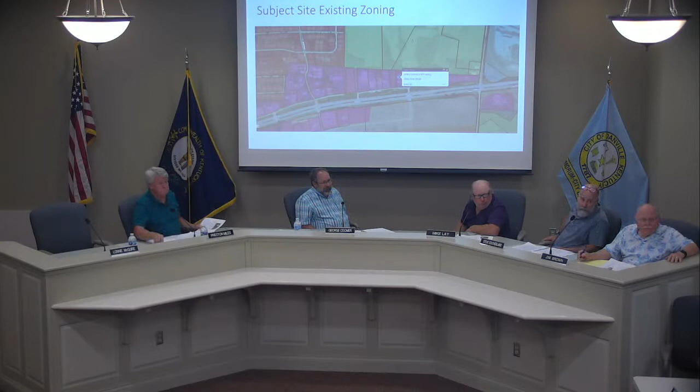Michaela, I'll turn it over to you. Yep. I won't speak too long because the applicant did prepare a presentation, so I didn't add too many additional slides. But the property is zoned highway business.

It has frontage on a private access road that serves 8 properties. The private road serves as a frontage road that parallels the bypass. The applicant is requesting a variance to waive the screening requirements for vehicular use areas.

For this western property line, the landscape buffer area on this eastern property line, and then the frontage, the screening requirements along this frontage here.

This is an infill style development project. This parking area is existing. The 2 buildings are existing. They're proposing a small addition in the middle here and then a vestibule. This is an existing drive along this western property line that goes right up to the property line, and then it has a chain link fence.

Let me see if I can find it, right there. So you can see the drive goes all the way up to the property line, and then there's a chain link fence. There's also some elevation drop there. There is some existing vegetation on the eastern property line.

The issue with the eastern property line that they're asking a variance for is we require an average of 10 feet of landscape buffer. The rear part of that property meets the 10 feet exactly. The front part is an average of about 7.5, so they're slightly below that 10-foot average that we're asking for. My biggest concern comes with this variance along the front here.

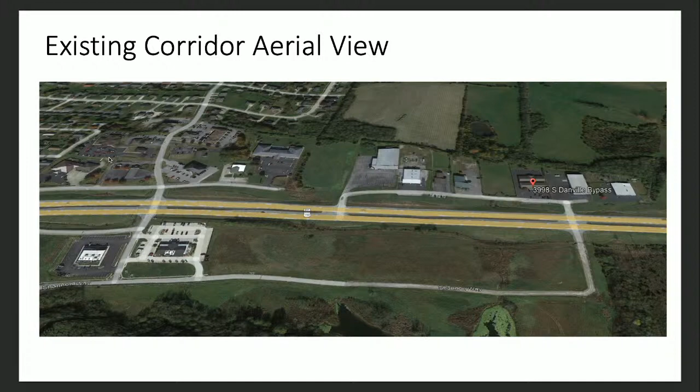It's zoned highway business here. This is the site aerial shown earlier, so you can see the access to and from the property. This kind of gives that existing corridor view, so you can see where all of the properties are built out to that access road, in a similar manner as our existing conditions.

This shows the frontage view, so you can see the parking area in question here, this property line, and then the retaining wall and fencing along there. That retaining wall is there, you can see the extreme grade change between the two, so it goes right up to that wall.

This shows that frontage road, so you can see the existing conditions all the way down it, with pavement up to it. And this is a view looking back towards the site, so you can see there's similar existing conditions along all of these properties in terms of retaining wall built out to the frontage road, and kind of that similar style to what the existing conditions of our property are.

So on our property, as she had stated, the site came before the Planning Commission in '99 for approval of this back area and the access point that comes along here.

The building additions are this addition here that's 806 square feet, a connector between the two, and that 210 square foot front entry. It puts it at a total with the existing and the building additions at 11,216 square feet. The existing buildings, the two between them, have 10,200 square feet.

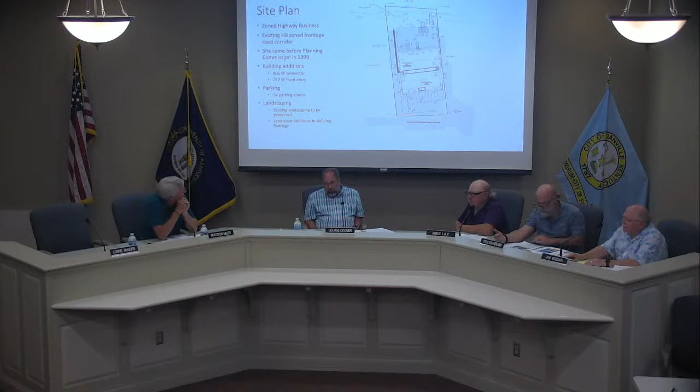Put a little curve around it, I guess. How many parking places do you propose to have? So these are all existing parking spaces, so after everything that's done here and any striping for the dumpster, it comes into 54 parking spaces.

And you said you were required to have 45? Yes. So you could lose 9 and still be in compliance? Yeah, we would be at the minimum.

Can you go back to the slide that shows all the parking? This one? The overlay view. There you go. So you have parking row here, parking row here. This is a partial parking row, so it's not fully all the way down striped, but it's from this portion back. And then you have these rows in the rear. And you have 4 ADA spaces here, and then dumpster with neutral zones right there.

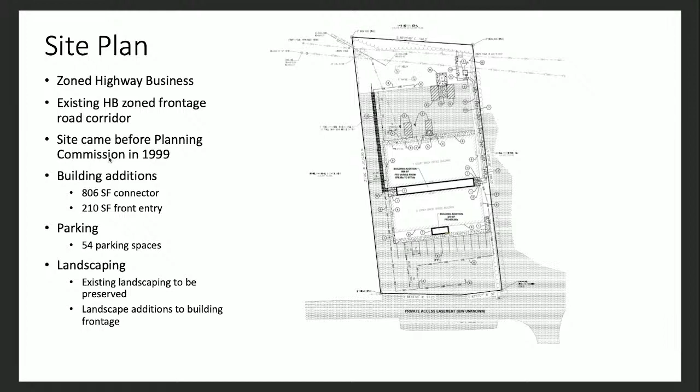Who owns the property on the other side of the access road? That would all be right-of-way for the bypass. So I think the right-of-way, my assumption would be that it probably starts on the other side of that private access easement, but I can't say for certain. That'd be my assumption, though.

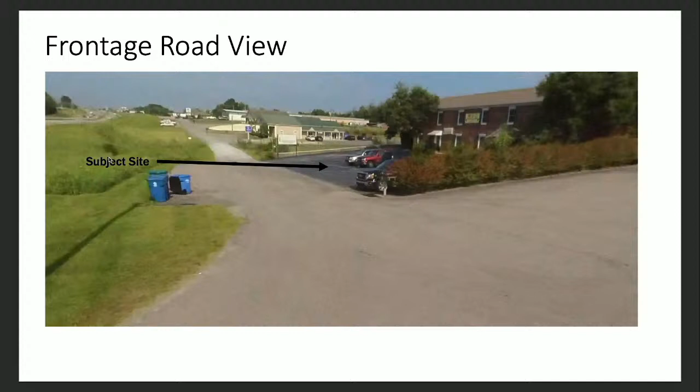Yeah, when you look at the photos, it shows the roadway here. There's also this pavement area that's been there. It looks like, based on the condition of it, it's been there for a long time. How many parking spaces do you believe you need at a minimum?

Matt Simpson. I'm the Corporate Director of Facilities and Safety for New Vista. We're the community mental health partner for Central Kentucky, and we serve Boyle County.

We have approximately 15 to 20 staff that work out of our Danville location, and when you factor in patients that come in through the day, we can potentially use all the space we can get, so we'd like to maximize as many spaces as possible. As far as a bare minimum, it's hard to say, because based on days and scheduling it varies throughout the day. But potentially, if we had that many spaces, we could use that many spaces.

Thank you. Any more questions for the applicant or staff?

George, if the access road, if the Peevler property has now completed that, it seems reasonable to expect more traffic. That road isn't officially completed, just to be clear, the connector road I'm talking about, but it's expected to be done shortly. It's under construction, not quite finished yet, but we have a bond for it, so it's going to be finished. Will it be a public right-of-way? Yes, that's where the city street ends, the public right-of-way ends.

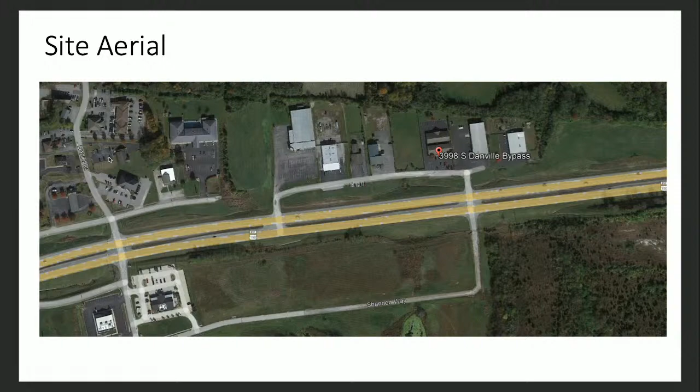Any more questions for the applicant? None? Thank you. Is there anyone here to speak in support of the applicant? Anyone to speak in opposition of the applicant? Hearing none, we will close the public portion of the hearing for the board to deliberate.

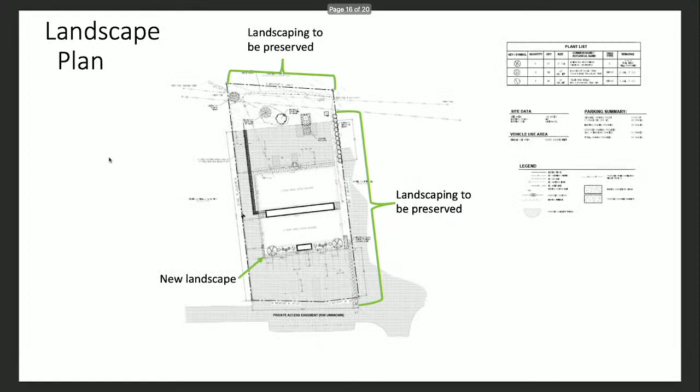Yeah, there's 3 variances. So you want to talk about the variances one at a time? Could you put the slide back up that shows the 3 different variances? Okay, start with number 1.

I don't see a problem with that. Do we need to vote on these one at a time, I'm guessing? Let's do that. Sarah, I'll approve. Motion and a second to approve variance number 1. Any discussion? All in favor? Motion carries unanimously, so variance 1 is granted.

Variance 2 is the parking. I kind of think without those non-spaces, they're still in compliance with 45 spaces. I'm willing to go with 3 of the spaces, but not all 9 of them. I think the 6 on the left should go away, and the 3 potentially could stay.

Would it be feasible to add 2 more where there aren't any and move the vegetation line back? The only thing I think would work here is if you did 2 parking spaces parked this way and parallel parking there. Would that get you a couple more parking spaces and bridge the gap? That's where you might put a blind spot. Yeah, but even if you got, people are gonna park where they park. If they redo the area and stripe it, it's going to help to some degree.

So, is your motion made? Yeah, I would update my motion to say that we approve variance 2 for 5 parking spots only and waive the landscaping on condition of striping the lot. I don't think that we need buffers or concrete barriers, so I'm not considering that part of my motion.

It's a motion, is there a second? Motion is seconded. Let me just jump in here because I want to make sure we get this right. It's to grant the requested variance, waiving the landscape buffer, conditioned upon an amendment to the site plan, leaving the 3 easternmost spots and turning the 6 westernmost spots into 2 parallel spots.

So this application is actually going to planning commission next week. So I don't know if it's appropriate if we're gonna waive the screening for the site plan just to be reviewed by planning commission and they can make that determination on the striping, or if we want to do that condition. Does that make sense, Henry? Can they put that condition on it? I think that they can. Your question is, can we tie the planning commission's hands to a different design?

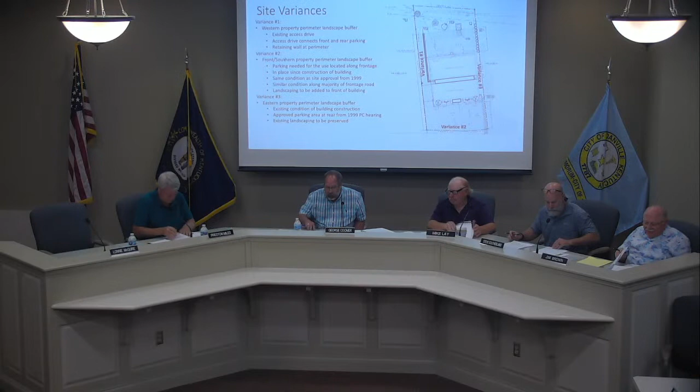Okay, our next hearing is Grace Community Baptist Church, through Anthony Roy, has applied for a conditional use permit for the construction and operation of a church on a 7.020 acre parcel of land known as 4680 Lexington Road in Danville. The parcel is zoned agricultural.

So we will follow the same plan as before and begin with the staff report. All right, I've grabbed the wrong staff report. Okay, the applicant is requesting to build a 2,400 square foot church building with 35 parking spaces, which meets our requirements as far as parking is concerned.

They are proposing a new entrance onto Lexington Road, so they would have their own private entrance. This lot was subdivided through Planning Commission in the last several months. You can see there was an ingress-egress easement that used to serve this entire farm. This lot is now being proposed to be served by this new entrance, which has been approved by KYTC as a commercial entrance.

And like I said, the parking would meet our requirements. They're proposing 130 seats, that would require 33 spaces. They're proposing 35.

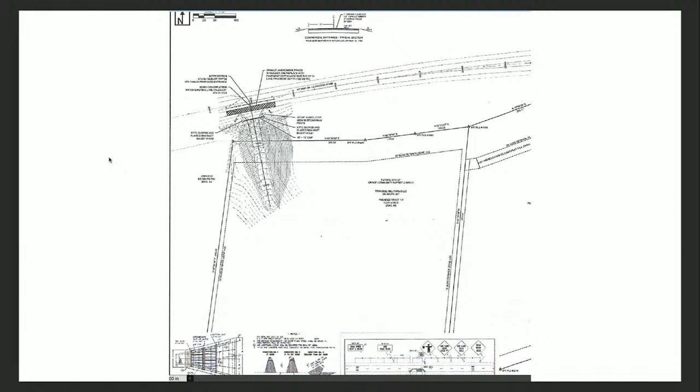I'm Will Stevens. I'm with Vantage Engineering, 2038 Danville Road, Harrodsburg, Kentucky, 40330. And I'm here on behalf of the applicant, Grace Community Baptist Church, and I do promise to tell the truth.

I won't belabor what she's already described, but I think the biggest hurdle has been cleared in that we do have an approved commercial entrance from the Highway Department. Its location is in part due to the topography mentioned. It gives us the best chance to have a smooth grade up to the site pad. It's also the furthest we can get it from Chenault Bridge entrance, so there's no conflict with their left turn lane. We've got the best sight distance possible at that location. So I think that was of great importance.

We will be served by water main on Chenault Bridge Road. There's an existing water easement that's continuous from that water main to our site. It'll be about 2,000 feet of water line, but we'll be working with the city on that to ensure everything's up to standard. The plan that you see there is very preliminary.

If we're approved tonight, we'll of course submit a full site development plan to planning and zoning, where we'll flesh out things like stormwater detention and maybe some tweaks to the layout that you see there.